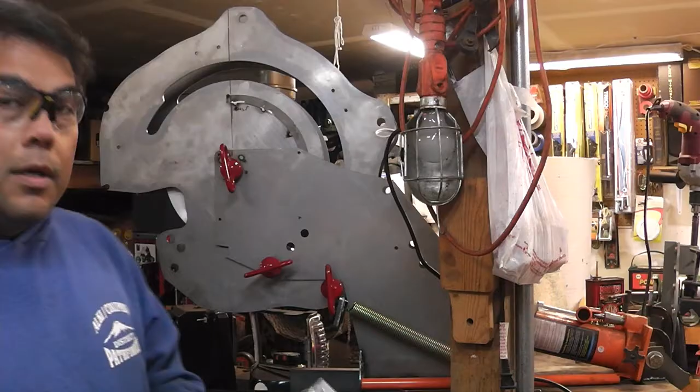Alright, now we got our tube cut to length. We're going to stick it in the tubing bender here. We've got the 1 3/4 dies in there. Plug them in. We got the air hooked up. We're ready to bend here. I really need to paint this and get the stickers on it. But anyway, we've got the angle finder here. Set him up on 0 here.

So we're going to have to bend this in 2 steps because we need 145 degrees. We'll go 90 and then we'll have to reset and then we'll bend it again to 55 to create the 145 degree bend. So let's take him around to 90 degrees. Okay, we're at a good 90 degrees right there.

So now we have to reset, release the cylinder so that it goes all the way back, and then we'll hit the next hole. Here it's just underneath the spring, so you can't see it. And then we'll continue to push that additional 55 degrees for that 145 bend. So we're going to run it up until the pin is tight up here. And then we'll reset our angle finder.

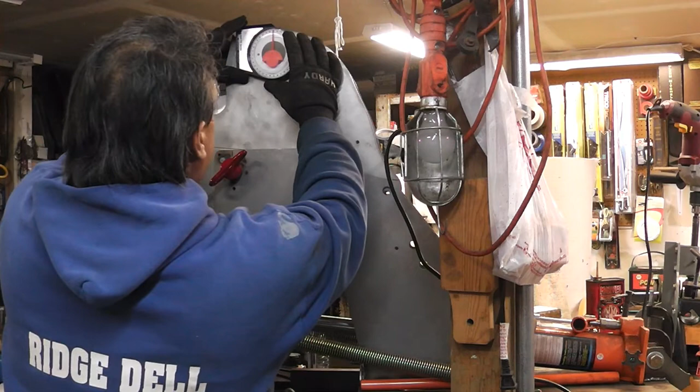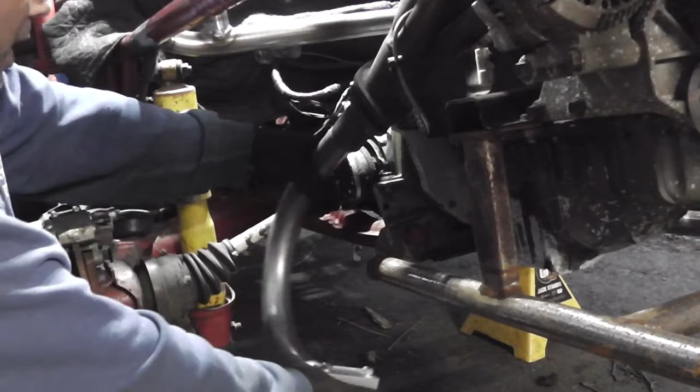So we'll put him up on the exhaust and take a closer look at it and make sure it's the bend we want, because we're set up here with the clamp block. We'll leave the clamp block alone until we figure out if this is the bend we want or if we need to bend it a little bit more. Okay, so holding the pipe up in there, kind of where we want him.

So you can see the bend came out perfect, so it's parallel with the bottom of the cradle there, but it's below the cradle. I'd say a good 3 or 4 inches below the bar. Let's find out what kind of bend we need to put in the next pipe so that it gets us back above the bottom of the cradle and then parallel to the cradle, so that we can put the muffler on that pipe.

All right, guys, I just wanted to go over my thought process here in building that exhaust system. So when we got on the Buggy, we had that little stub piece of pipe coming out of the header. So I took the angle finder and measured it out. It was 45 degrees. Then I put the angle finder on the cradle itself, on that lower bar that we wanted to be parallel to, and that came out at 10 degrees. So subtracting the two, we find the interior angle, or the inside angle, which ended up to be 35 degrees.

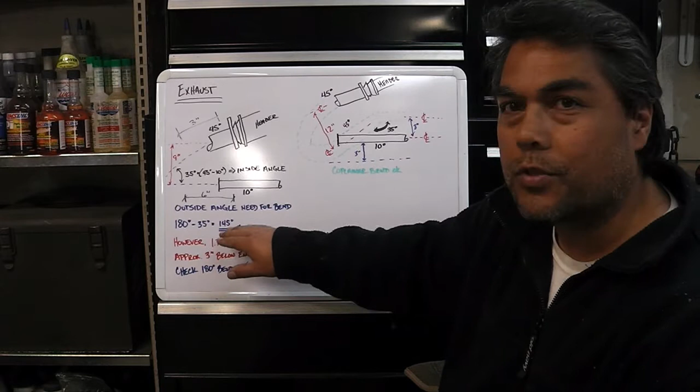So that was the first bend. Instead of doing that inside angle, we were wanting to bend all the way around. So basically the angle that we needed, the outside angle, was 180 degrees minus 35, so we needed a 145 degree angle. So we bent that up. The angle came out perfect, but what I didn't account for was that the radius of the die, 6 inch, now has a diameter of 12 inches.

So when you bent the tube to 145, it came out right. All of the angles were right. We had a 45 up here, and then we came out to this, and we're parallel to the lower tube on the cradle, but we were 3 inches below the cradle.

So I looked at what the center line of the stub piece coming out of the header versus the center line of the cradle tube that we were trying to align with, and that was 9 inches. So we were right on the money. It was at a 12-inch diameter, you'd expect it to be 3 inches below the bottom of the cradle. So I wrote that here. It's just the 1 3/4 die has a 6-inch radius or a 12-inch diameter. So the 145-degree angle works, but you end up 3 inches below the engine cradle.

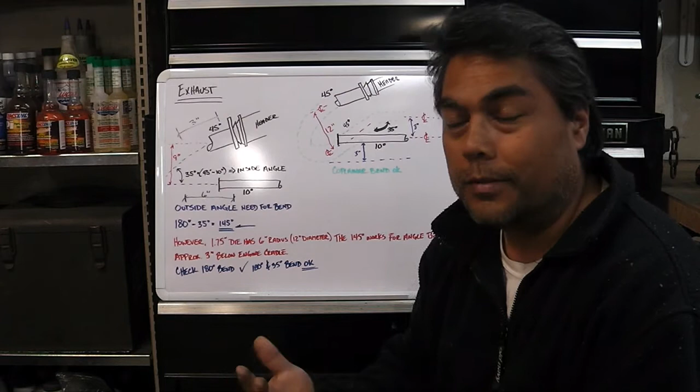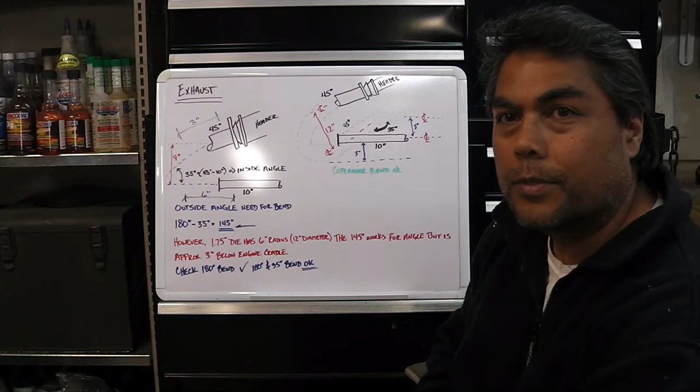So the thought process from there is, how do we use that 1 3/4 tube and get it up above the cradle as quickly as possible, and then go parallel to the cradle tube. So, well, you got to do a 180. So we come out of the pipe at 45 degrees. We bend that 180. Let's see, it's up here. We come out at 45. We bend that 180, and then we come up above the bottom of the cradle tube, and then turn that 35 degrees so that now we're running parallel to the bottom cradle tube.

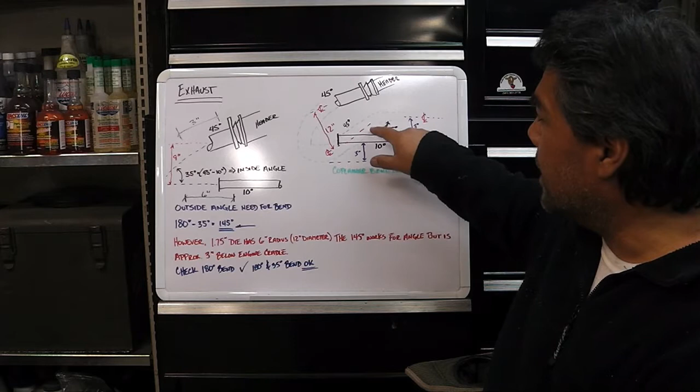So we know from the angles that we figured out initially over here at 35 degrees, the difference between the angle of the stub piece coming out of the header versus the angle of the cradle tube that we're trying to be parallel to. We figured that out at 35 degrees. So if we come out at 45 degrees and do 180, we're coming up at 45 degrees, but now we got to settle it back down to match the bottom cradle tube, so because of the interior angles and stuff, we come up with that 35 degrees again. I've got some math here, and I'll try and explain the math on that one too.

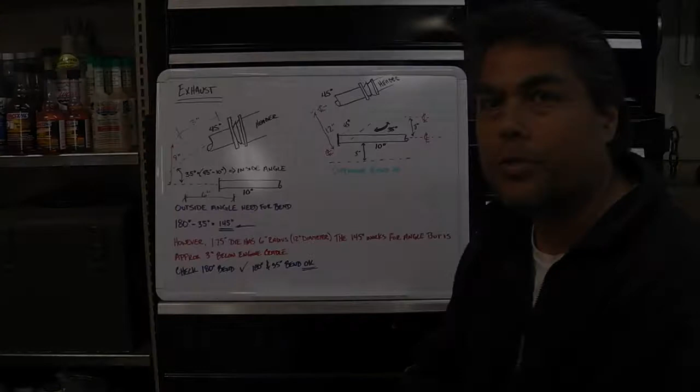Okay, here's the math on the length of the tube and the lengths of the bend in the tube. So in black up top here, that's our first attempt at trying to do the 145 degree bend. So figuring out the length of tube that I needed to cut, I came out at 24 1/8 to give me just a little bit extra on the end, because it came out to be an odd number, 24.08. So I rounded up so that I had enough pipe for sure.

Measured out where the clamp block face should be, and the Rogue Fabrication bender has some numbers on their stickers that go on the side of the machine, so that you know from the face of the clamp block where the tube will start to bend or draw through the machine. And that's at 5 7/8 according to their sticker. So because the 145 degree bend didn't work, now we're trying that second bend, which is the 180 degree bend, and then the 35 degree bend.

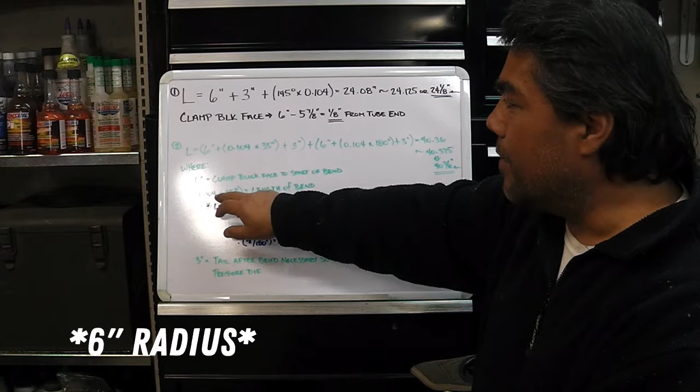The length of the bend itself is identified by this 0.104. Again, that number is on a sticker on the side of the machine that tells you for a 6-inch radius die you need to multiply that 0.104 times the angle that you want to bend, and that will give you the length of the bend. Breaking that down a little further, the length of the bend is the radius multiplied by the included angle, the angle you want to bend, multiplied by pi over 180 degrees. So that's the equation used to come up with the length of the bend.

So the radius of the die is known. That's 6 inches. The included angle is the angle needed. And the pi over 180 degrees is a constant. So where that 0.104 comes from is you know the radius of the die and pi over 180, you multiply those together. Lastly, the 3 inches is the tail after the bend. That's necessary so that the tube doesn't draw past the center of the pressure die. I've had that happen a couple of times and it's really crinkled the pressure die. I need to get some new ones. But that 3 inches is necessary after the bend.

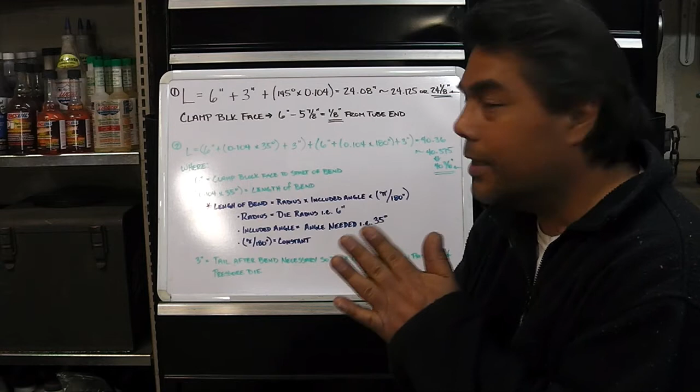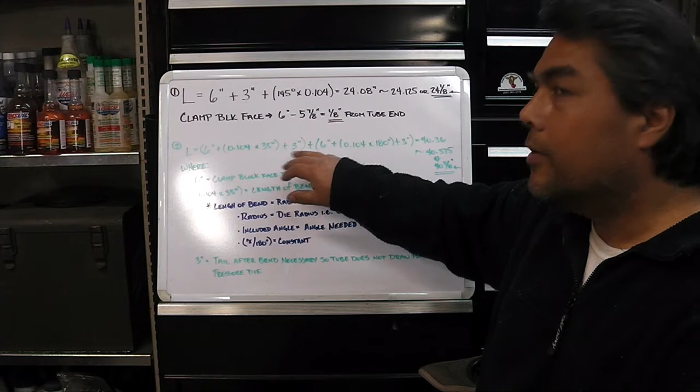I've tried to isolate or identify where I need to place the clamp block in order to get the bends that I want, and minimize the number of locations for that clamp block. So I think what I'm able to do here is place the clamp block at about 12 5/8 inches towards the center of the tube. So measure in from one end roughly 12 5/8 inches for this 35 degree bend.

Leave that clamp block where it is, flip the pipe around, and then bend this second one, which is the 180 degrees. So as we saw in the last whiteboard, we're going to bend it in a line or coplanar, and so we don't have to rotate the pipe at all, or the tube. We can just leave it in line with each bend.

So I think what I'll be able to do is bend this 35 degrees, take the pipe out, flip it around, stick it back in the machine, and then bend this 180 degree bend. And that will get us where we need to be for all of the angles that we want to bend to get that exhaust going on. So we're going to try that, and hopefully this comes out.

But anyway, that's where the math comes from when you're looking at tube bending. It's not too dissimilar from any other tubing bender. So if you ever want to figure out what the length of the bend is going to be on a different bender, as long as you know the radius of the die you're using, it could be 4.5 inches, it could be 6 inches, it could be 8 inches, whatever, and then you know the angle you want to bend to, you'll always be able to figure out the length of your bend.

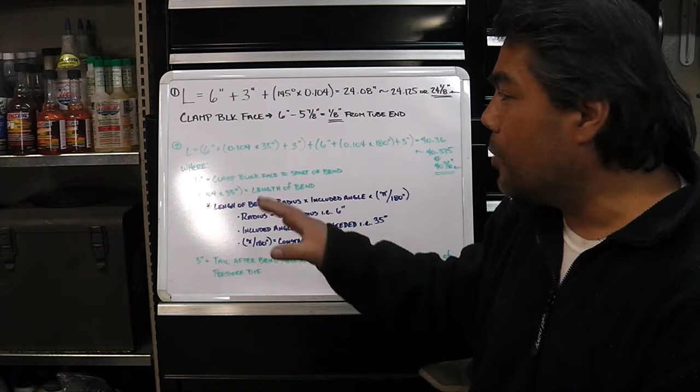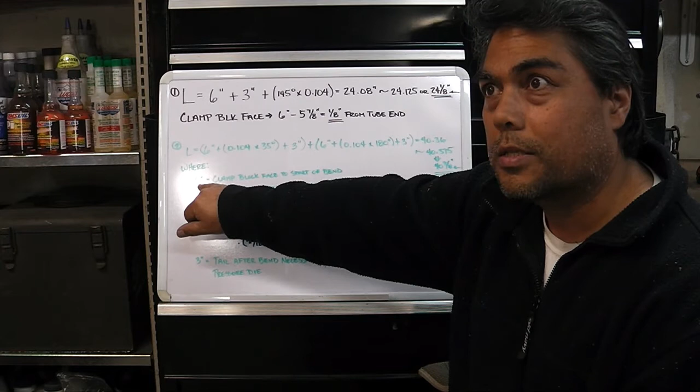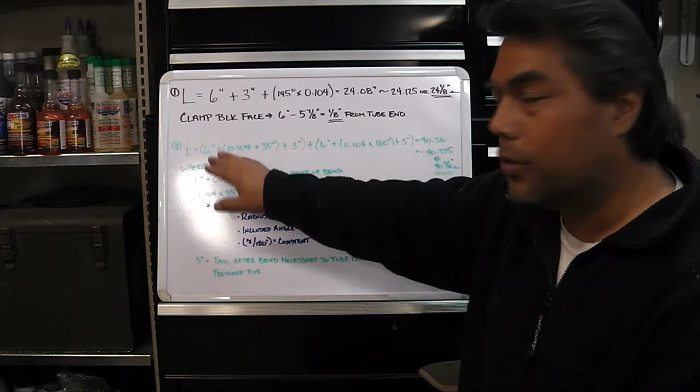But one of the things that you need to figure out as a part of figuring out the length of the whole piece of tube that you want to bend is knowing how far from where the tube is clamped or held before it draws through the bender or through the die. And then you add those two together to start getting an idea of the length of the piece of pipe that you need to have.

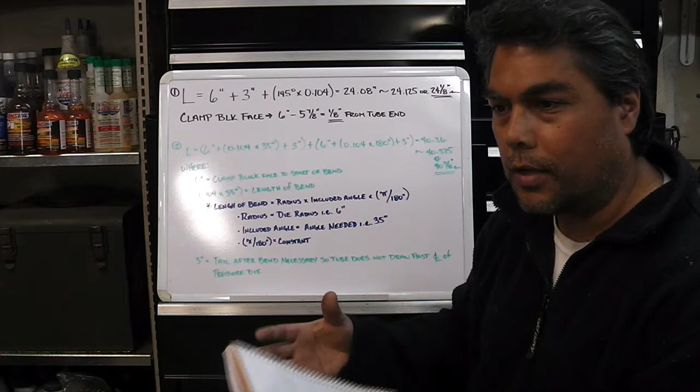And always you want to add some kind of tail. For the Rogue Fabrication M600, I've always heard that you want at least a 3-inch tail, or a longer tail, so that you don't draw it past the pressure die. So that's kind of what I'm going with here, at the 3 inches.

All right, now we got the welder set up, and so what we need to do now is put the exhaust pipe where we think we want it, and then get the muffler in its location also. Then we'll tack it in a couple of places just so that we can step back and make sure that that's what we want, and then we'll go from there.

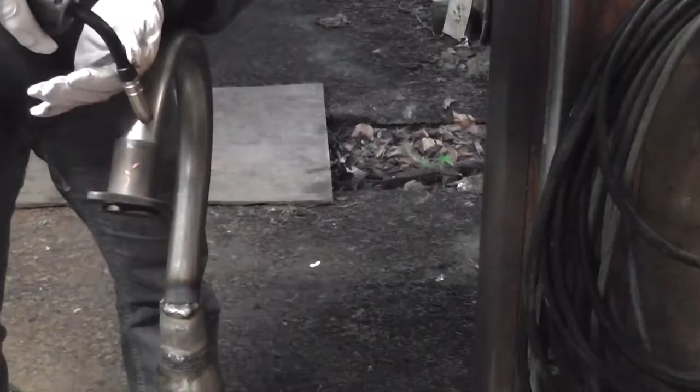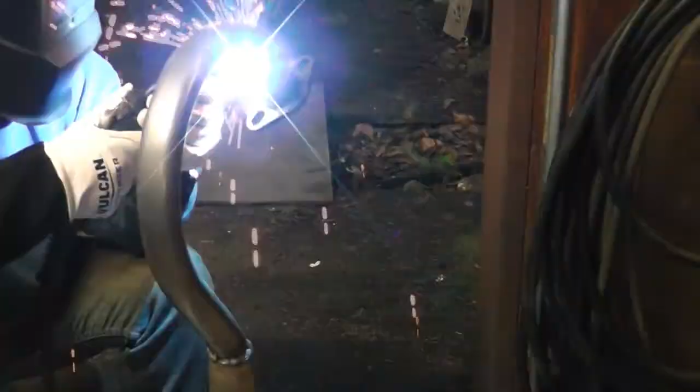Okay, I've got the muffler and pipe all set up. We're going to bolt it back in place, and then look at the system and find out where we want the exhaust hangers, and see if we need to weld any tabs on the muffler or on the pipe itself to attach the muffler hangers from.

We have the exhaust tube turned out slightly. We are maybe an inch and a half below the bottom of the cradle tube at the lowest point, but we're coming out above the cradle rail about 2 to 3 inches higher than the lower cradle tube. So I think we're gonna come out good on this. So let me back you off so you can see the whole picture here, and then we'll work on where we want to mount the exhaust hanger.

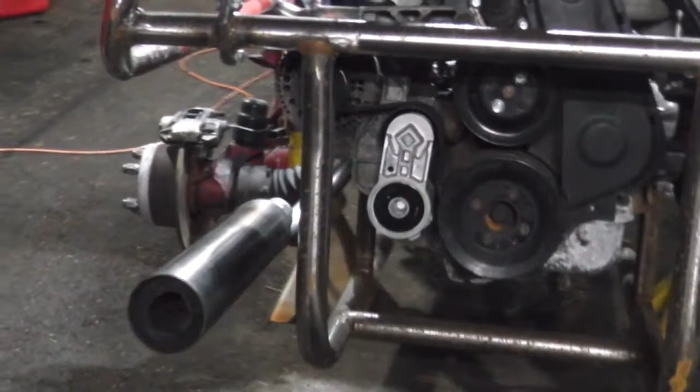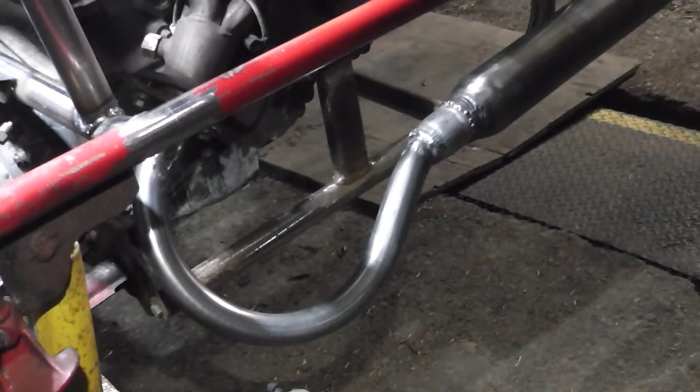Okay, so that's how the muffler hangs out the back. Let me take you off to the side so you can see how much it sticks out. It's not bad. And it is above the lowest point on the frame here. When I'm doing a wheelie or something, it's not necessarily going to drag. So it's got kind of that question mark shape, but it looks all right.

So building the exhaust system was a confidence booster. Being able to run the calculations to find the length of the tube I needed, cut the tube to that length, put it in the tubing bender, and bend it the way it needed to be bent. Yeah, it was a confidence builder. So the next part of the project that needs tubing bent, I've got that much more confidence.

So stay tuned, my friends. Next up is plumbing for the radiator. I'm going to try and hardline the system. I've got some inch diameter copper tubing. We're going to do some cutting. We're going to do some soldering.

We're going to build and fabricate some structural supports to put underneath the copper pipe, because it's going to be long runs, and as we're banging around out in the sand, all of that copper tubing needs to be supported so that it's not bouncing all over the place and bending, because it's a super soft metal.